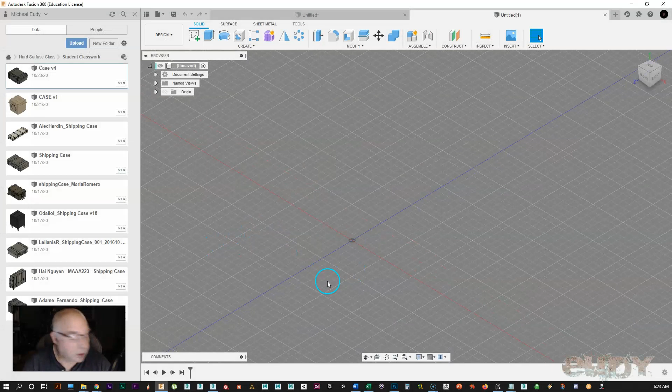Okay, so what I wanted to do is just show you how easy it is to use Fusion 360. And this is a CAD modeling software.

It's also parametric, which means there's no polygons when you're creating. You're creating through solids, not like something like Maya or 3ds Max, which creates in polygons. There's no polygons in this software.

In 3ds Max and Maya, those polygonal modelers, when you're creating something, it's hollow, like skins. In Fusion, when you create something, it's a solid. So when we cut into it, it's just like a solid block of metal or something.

So there's lots of ways to model inside of Fusion, and I was going to show you a quick way how to do some things that would help you.

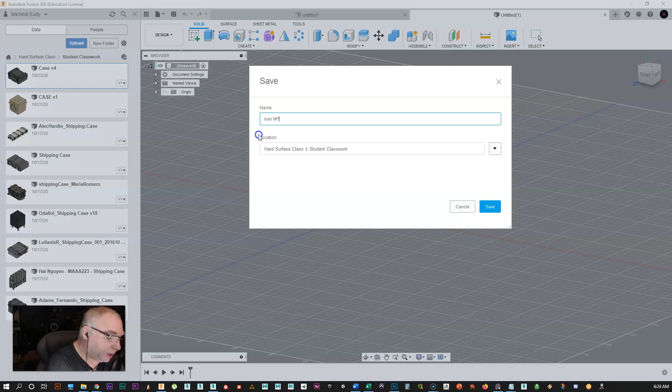Now, one of the first things you want to do is be organized. So I have a new file here. I'm going to save the file and give it a name. By default, it's saving on the cloud, so I've got a folder called Student Classwork. I'm going to base this off of Ivan's sketch, so I'm just going to call this Ivan MP3 Player.

Okay, so it's saved and you'll see it up here. Now, I've initially come in here and here's Ivan's drawing.

I'm using PureRef, which is a software for gathering reference. What's nice about it is it'll float over the top of your software. So here's Ivan's sketch, nice sketch.

I also went in and got some information on the USB port here, because we really don't know how big this sketch is, but we do know how big this USB port is. So that'll help us in creating everything to the right scale.

You'll see here that this says that this is 12.4 millimeters wide. So that's what we'll do, is we'll bring it in here and then we'll calibrate this, so when we're building things, we're building it to the actual scale.

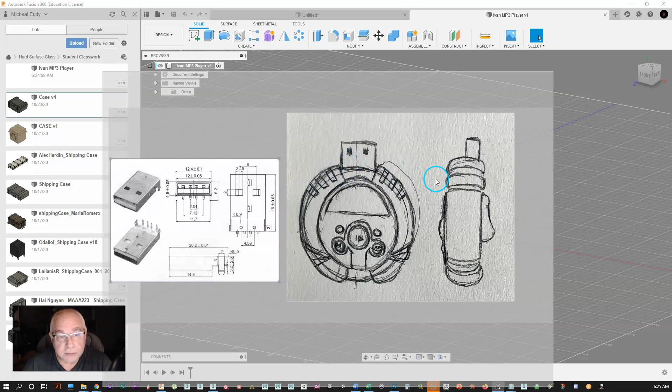Now we want to be organized here, so we want to be creating in layers. There's two ways to do that. You can go right here on the title, right click, and go new component. A component is a layer. You can think of it as a layer, kind of like a layer in Photoshop, but it carries more things like sketches, and our model and everything is inside of a layer.

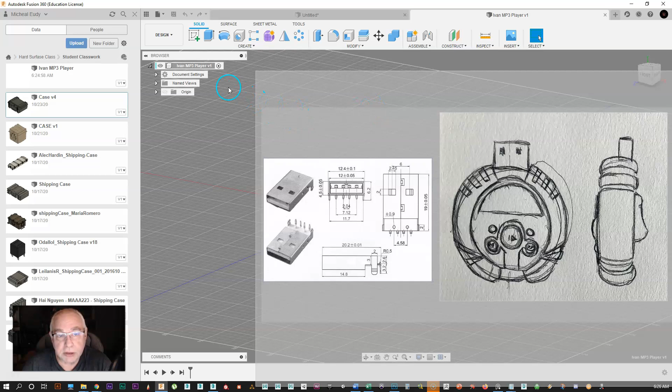Now we want to do that because if we don't organize this, it can get out of hand really quick with our timeline down here at the bottom, and you'll see this as I go along. Also, that's this button right here, so I can click this and say, okay, let's create a new component.

I'm going to say, okay, we're going to call this... we'll say this is outside ring, so I'm just going to call this outside ring that we'll make on this layer.

Now, I don't want to activate this. What this means is that when I make another layer, it's going to put it underneath that layer, make sub layers, and I don't want to do that. So I'm just turning off activate. In other words, when I make this, it will be underneath this layer. This is like my master layer, and there'll be a layer underneath that. I click OK, and you'll see there it is.

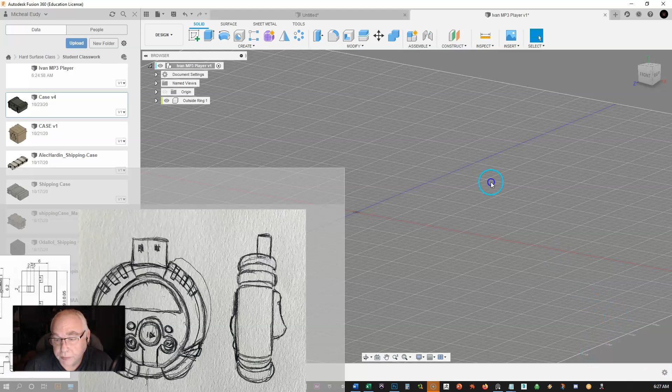Now you'll see I have some little colors on mine. By default, Fusion doesn't have colors. There's a little gear down here in the bottom right hand corner. If you click on that, you can see component color swatch. If I turn that off, you'll see this is the default setting, there's no colors, and this is an advantage to have these color coordinated, and you'll see this here in a little bit. So I'm going to turn that back on, and then it just randomly gives it colors.

So that's the outside ring. We'll make another one, which is the inside—let's just call this base, which will be this base piece here. And then we can make one called controls, so we can put all these controls on that.

And I think that's all we need, because we'll put the USB on the base, and then we'll have these pieces, then we'll have those pieces. So that's about as organized as I need to be. Now, you need to do this up front because you can't do it afterwards. As we make things, you can't move things around, or move the timeline around. So you want to do this up front.

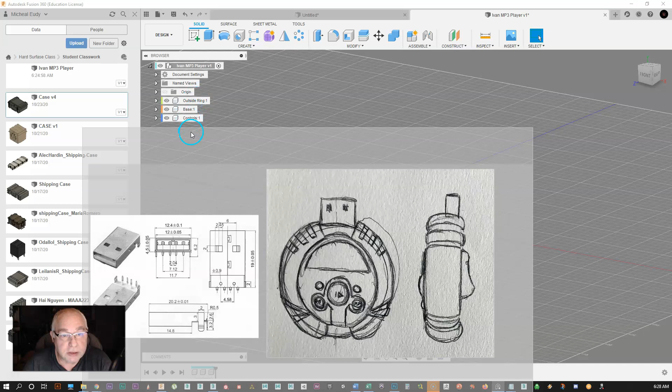Okay, so let's bring our sketch in. Pretty easy to bring the sketch in. You're going to go up here to this that says Insert, and it's called a canvas. That's what we're doing. Then I just have to go find it and have it right here.

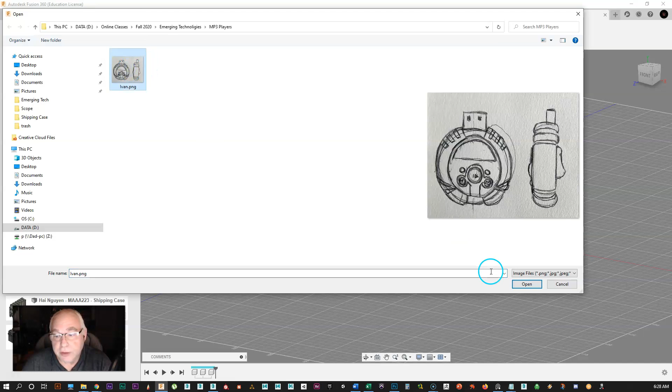And then I have to tell it which way we want it to face. Do we want it to be on the front? Do we want to draw it from the front, from the side? I want to draw it like it's laying down, so I'm going to draw from the ground. So I'm going to go here.

Now Shift, center mouse button is what pans you around, and then this little gizmo is move, but this corner is scale, so I can scale this up. Now we're going to calibrate it here in a minute. I'm just getting it kind of big enough where I can kind of see it. Be sure you grab the corner, because if you grab this, that stretches it. Okay, we don't want to do that.

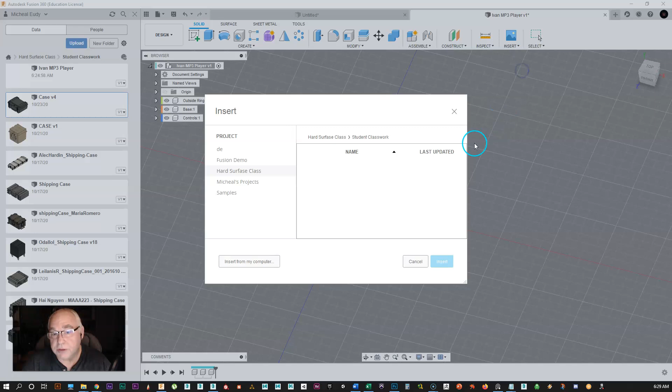Okay, so canvas, from your computer, pick it. We're going to go pick the ground plane and then just scale it up some so it's easy to see it. And just click OK. Go to the top view and I can see that.

All right, I want to rotate that, so you'll see canvases right here. Okay, now I'm on the base layer, and you'll tell by this little black dot here. You'll see this layer, see how it doesn't have a black dot? That's now I'm on this layer. So I'm putting the canvas on the base layer, and you'll see there's some little icons down here. These icons are what I am doing.

Okay, this is my timeline. I can open up Canvas right here. You'll see there it is, and I can tell that I want to edit it, and I'm going to rotate it. I want to rotate it up, and that's 90 degrees. And if I grab this, this is moving it.

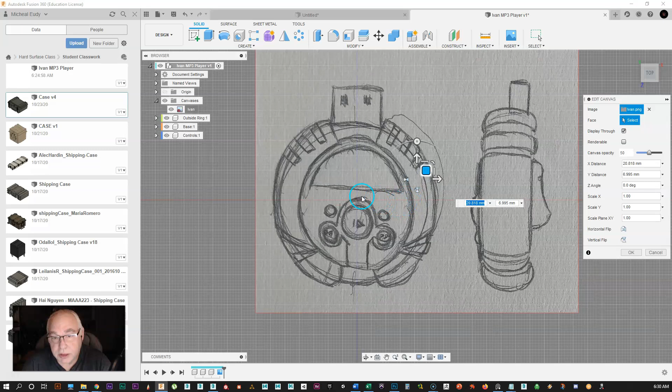Okay, and I'm going to move it so that it's pretty much centered. You could turn down your transparency some if you want to. There's the center of our world. And so it doesn't have to be perfect.

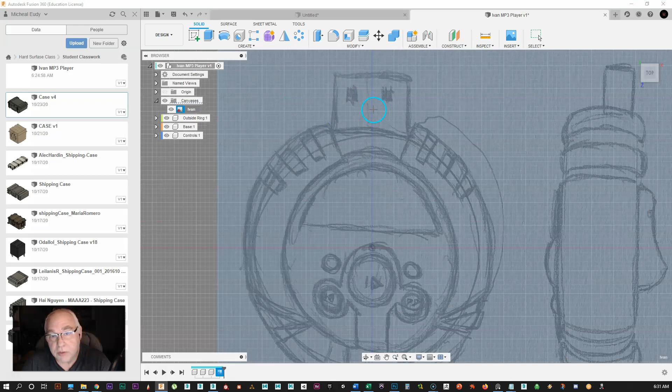That looks good. And now I'm going to do what's called calibrate it. So I'm going to go to here at calibrate. Now I know that this is 12.4 millimeters wide. So I'm just going to click here and I'm going to click there. And then it's going to tell me. So I want this to be 12.4.

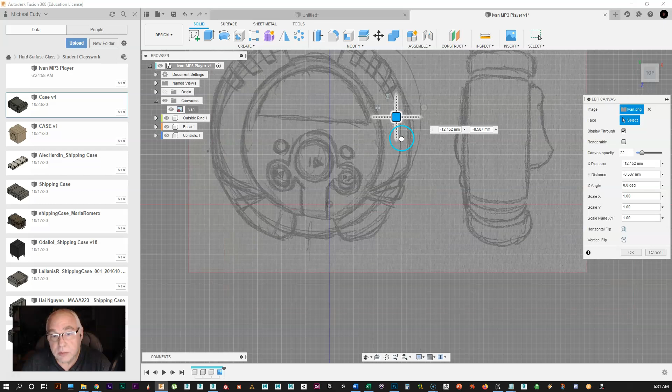And then it will scale it to that. So now I can go back in if I want to do that again, just to check it, calibrate, and I go from here to there, and you'll see it's about 12.4. And I'm going to do that again. Okay. All right, so I probably want to, now that that's calibrated, I'm going to move it again. So I'm going to move it so that's, there's your center point right there, and it doesn't have to be perfect because the drawing's not perfect. And we click OK. All right, so now I know this is calibrated correctly.

Now, if you go up here under Document Settings right up here, here's your units. You can click on this and you can change your units to inches if you want to. I have a tendency to measure in inches, but to calibrate this, the measurement we brought in was in millimeters, and so I left it at the default in millimeters, which is fine.

Okay, so this is a Boolean modeler. We Boolean in here. It's also a spline modeler. We create things from splines. So I'm going to initially create this from a spline.

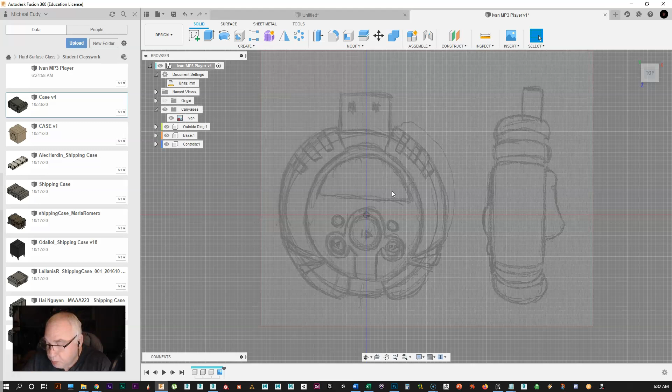So I'll go up here, create. Now, when you're in a three-dimensional kind of view like this, this is my sketch. When I sketch this, I tell it what view I want to sketch on. And now it's ready for me to do two-dimensional drawings on this. So all your tools are right in here, different drawing kinds of tools.

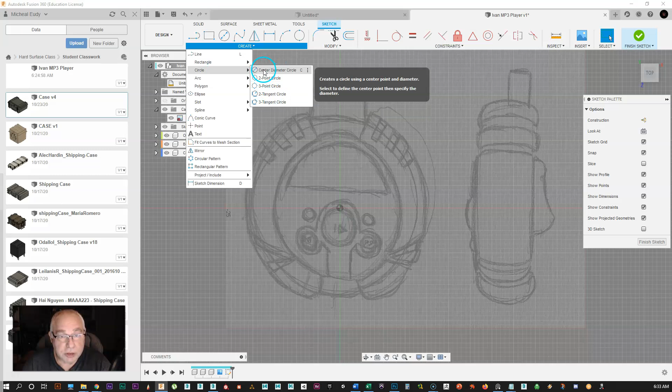Now a line is a straight line versus a spline, which is a curved line. So if you're wanting to make organic kind of curved things, you use a spline. But if we're just doing straight things, it's a line. Of course, then we have rectangles, circles, arcs, all different kinds of things. And like when you're creating a circle, you have different ways that you can create circles.

You can create them from their center or make 2 points, lots of different ways. Now, I have tools up here. For example, some things I'm going to be doing today is creating some patterns, so we're going to be doing that. We can actually put these tools - if you click right here, you can pin them to the toolbar, and it'll pin them up here. So we can actually customize our menu. But for right now, I'm just going to go circle.

Now this puts constraints on things. So when I go to the center and I click, I'm making this circle, and it's constraining it to the center there. Now it's snapping to the grid. I can turn that off if I want to. I can go right over here and turn off snap if I want to, which makes it a little bit easier to flow this.

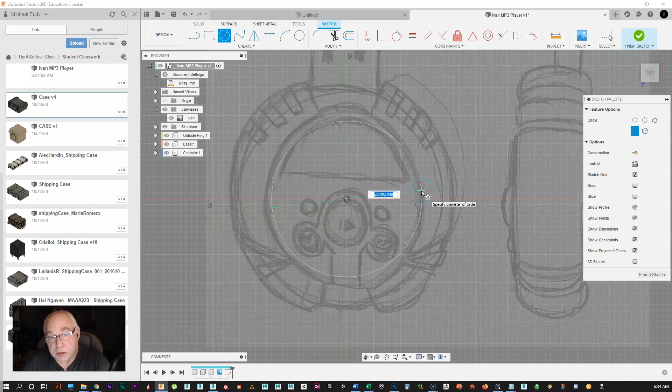And we'll say, okay, maybe right there is our initial circle that we're doing in here. And so then I'm going to finish the sketch. Now what I need to determine is what it is that I'm going to be creating first. So this is the basis of how you do things. It's pretty easy. And then if I want to make that three-dimensional, I just press pull, and I can bring it up, and now it's a three-dimensional body. That's kind of the basis of how we do things in here.

So I'm just going to undo this and go back. All right, so I'm going to be making this outside ring first. That's what I'm going to be doing first. So what I'm going to do is - I think maybe I'll draw my drawings on the base and then make the models on these, maybe. No, we'll just go ahead and do this. So I'm going to go to outside ring, and I'm going to click.

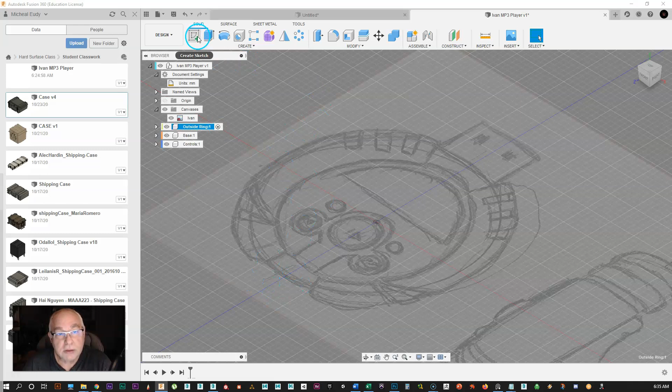Notice down here that you have icons down here. This is my timeline. When I go here and click this, you'll see I have nothing. That's because this is the active layer now. All right, so we're going to make this the outside ring. So we're going to click here, create a circle, snap it to the center. That's the inside of the ring.

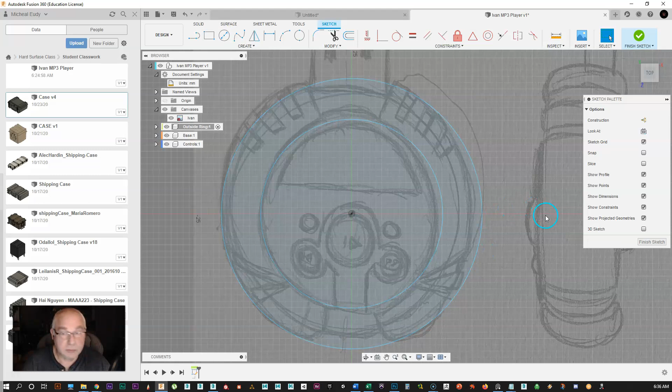Now I have 2 ways I can do this next one. I can go here and make another one like so - that's one way to do it. And I can undo that, Control Z. Or I have an offset tool here. I can click this and then click this line, and then it lets me offset that to create the outside line. So there's several ways that things can be made.

Okay, so there we go. All right, now I want to go ahead and draw in this USB connector in here, so I'm just going to draw that as a rectangle. I'm going to turn my snaps back on so it's easier for me to make it symmetrical. So that'll be to there. We're going to reset this anyway. So something like that. Now that's not going to be the right measurement, so I'm going to fix that.

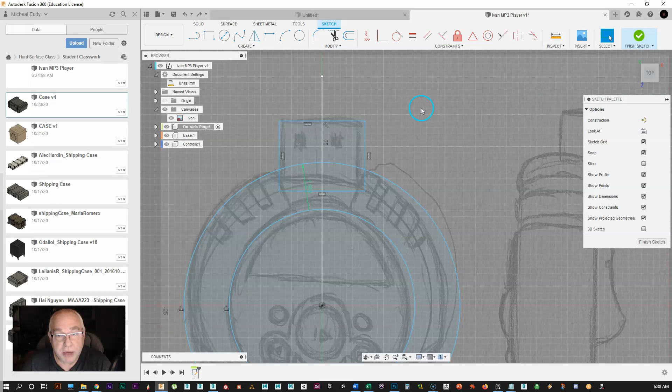I'm going to first do it by drawing a center line here. Okay, now once I have this line, I really don't need this line to model with. I want it to be a construction line, just like a line to measure from. So what you do is make this a construction line - if you click it, go here, make that a construction line, it'll be a dotted line. So these are lines to model from, and this is a line to measure from, is all I'm saying here. All right, so now what I want to do is calibrate this so that I know this distance here, because we know that it's 12.4 all the way across, so this would be 6.2 from here to there.

So I can go here and click Sketch Dimension, pick this edge and that edge, then pull up, and if I type in 6.2, it will scale that. Then I do the same thing again, go from here to there, and that one's 6.2. So now I know that's 12.4 across, and it's centered.

You'll see these little icons that pop up - these are all different kinds of icons. When you're drawing, you put constraints on it. This is software for creating prototypes, so it's very accurate. It's not like Maya or Max - those aren't accurate. I mean, you can do measurements, but they're not very accurate. This is for creating very accurate models.

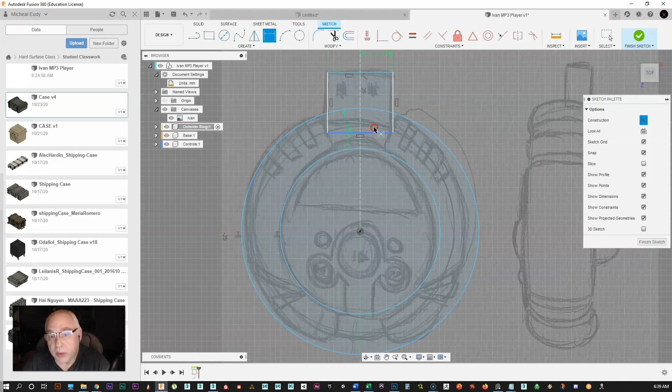So we have sketch dimensions. Now this puts constraints on it, which means I can't change this now. I mean, I can by coming up here and changing it, but I can't just grab something and move it because it's constrained.

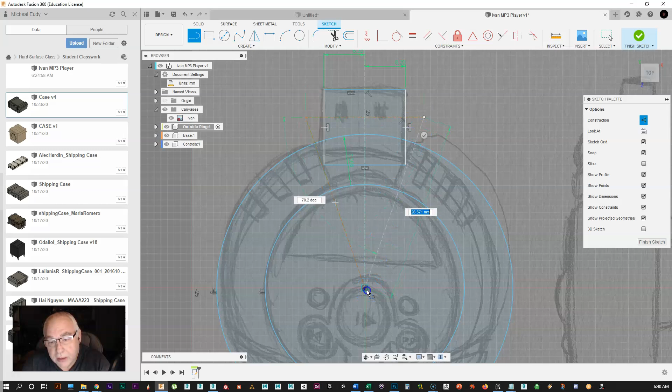Another thing I want to do here now is cut this right here so it only has the arc from there to there. I'll do that by drawing a line, snap it to the center, and go out here trying to go right across that line. I want to leave a little bit of a gap in here, so maybe right about there would work good. That's 3 outside of there, so 3 outside of here. And then go back, and that'll get me - yeah, let's click OK.

And I don't want those - sorry, I was in construction, turn those off, not construction lines. Okay, there we go. So this is where I'll be cutting this piece, so it'll only be arcing from there to there.

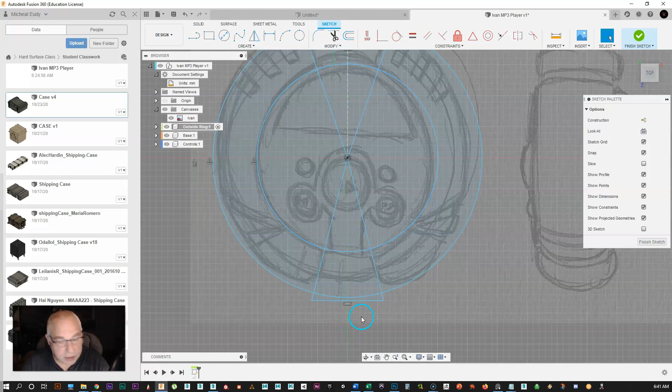I want to do the same down here. Looks like he's got it drawn somewhere right about there, so there and back. Now I don't really need these outside pieces here, so you can use this tool right here, which is trim - by the way, the speed key is T for trim - and I can get rid of that line and get rid of these lines. I don't need those, I just needed this cut piece here.

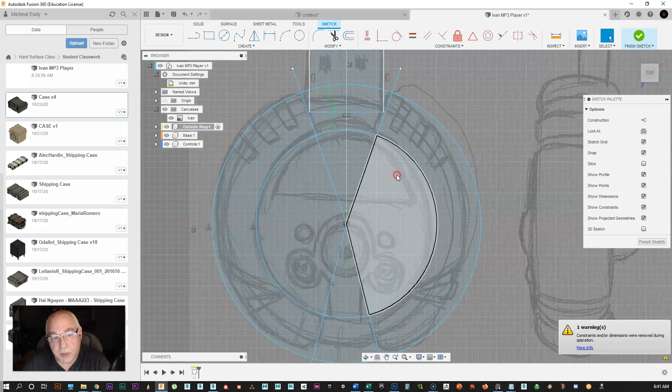Okay, so let's go ahead and make this little arc here, and we'll put that on the base. So we have to create a new sketch, and here, and then we're going to create the same thing as a circle here. Let's turn off our snaps over here. That's fine, and then we're going to create a line.

I'll turn my snap back on now, maybe right about here. And that'll be this piece there. So we can finish that.

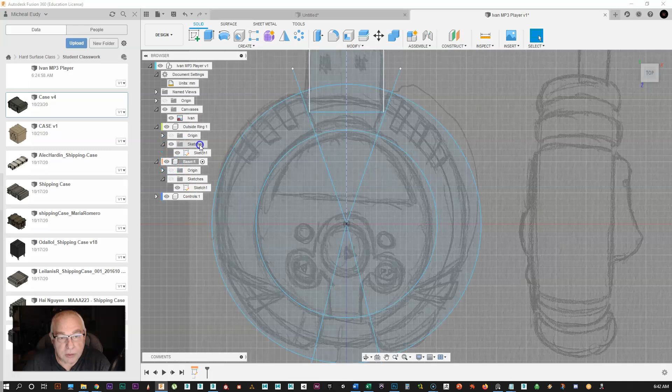Now, to show you, if I open this up now, you'll see that I have - and I'm going to open this one up here too. I'm going to turn that sketch off, which turns that one on, and then I turn this and turn that one on. All right, so I want to go back to modeling on this layer.

And now we're going to turn this into dimensional objects. So I want to take this, and I'm going to do a press pull, and then I can just pull it up for whatever dimension. Now, since we don't know what the dimensions are on this, I'm just eyeballing it. I can always go back and change it later if I want to, but he's got it pretty fat - maybe something like that.

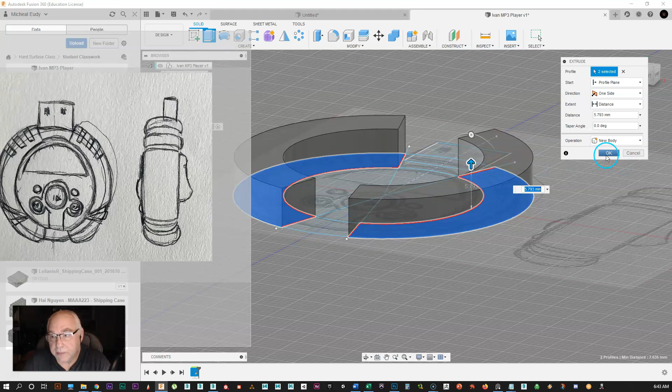Now this, and of course I have all kinds of things I can do - I can type in a specific millimeters. Matter of fact, let's just round this, and I can either type it in here or here. Let's just make this 6.

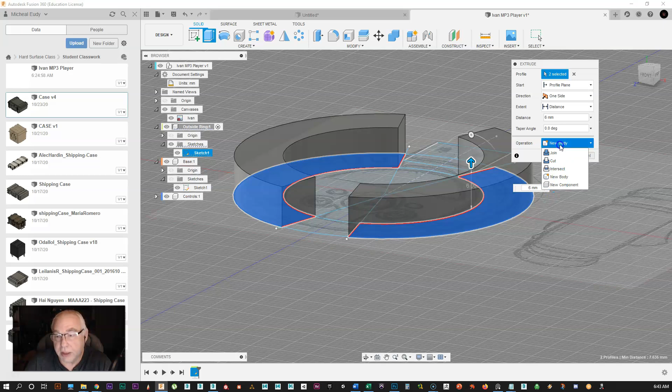And then I can tell it to make a new body. Your choices here are a new body, which looks like a new model, or a new component, which makes it a new model on a new layer, but we want to put it on this layer, so we don't want to do that. This is a Boolean modeler, so when I'm making things, I can tell them to join together, intersect, or cut - we'll show some of this later. But we're going to leave it on new body, click OK, and you'll see I have a new body here.

And it gives me two of these. Now I can rename these - so we're going to say this is left outer edge.

And I'm going to name this right outer edge. You should name things as you go along. Okay, we'll call this one our base sketch, because it can get pretty complicated, so you want to name things as you go along. All right, for right now I'm going to turn my canvas off as I work on this.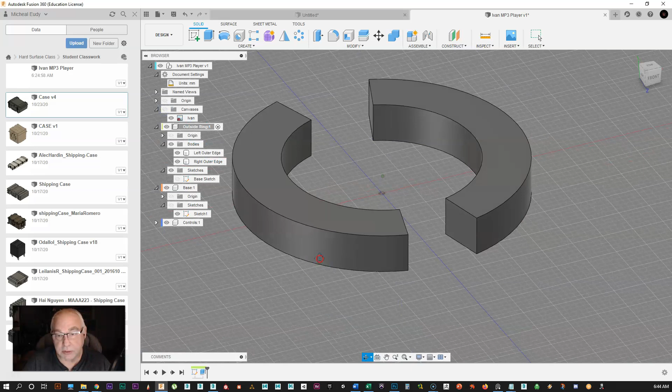By the way, it's Shift, center mouse button to pan around. All of your viewport tools are down here at the bottom. I can turn my grid on and off. I can turn my snap on and off. I'm going to turn my grid off right now.

All right, so now this is really chunky and this is round. Now I could make this completely round, but I'm going to make it roundish with a flat top. But that's just up to me in the way that I want to do it. Everybody, it's a prototype, so you're the designer, so you sketch it out and then you build it.

So what I'm going to do is come in here and grab this edge, holding down the control key to grab this edge, and then right click and say fillet. And then I'm going to click and drag this, and I can round that.

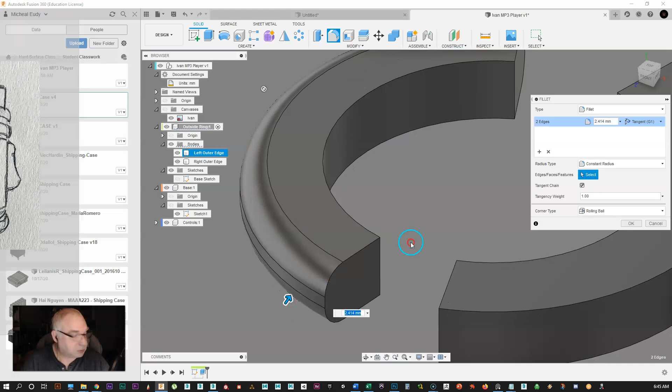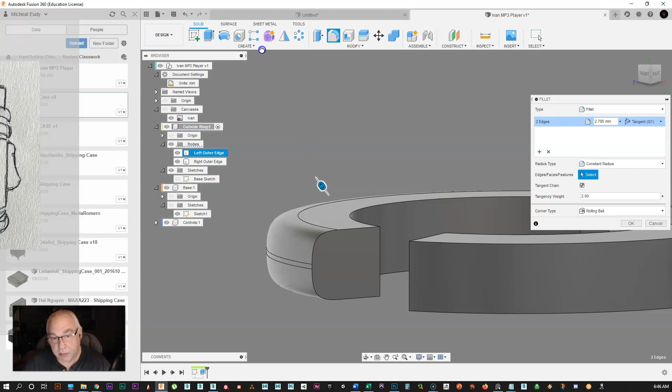I don't want it to be, I want it to have a little bit of a flat edge right in there. I don't want these on top of each other, so I want something like this. Now this has given me complete tangency, but I can grab this and come in here and bloat this out, or change how it's flowing if I want to, but I'm going to leave it at a normal tangency. And there we go.

So that's pretty easy. Since we're not dealing with polygons, I don't have to worry about where am I putting polygons or whatever. This is a great quick modeling tool, and it's accurate, and things can be manufactured from here.

Now, at any time, if I want to, I can go back and edit this. You'll see there's a timeline down here. I can go back in the timeline, turn that off, and go back into the timeline. I'm going to go all the way forward. So I can come down here, right click, and say, okay, let's edit this feature. Or I can pick it here and say edit this feature, and then I can make it bigger or smaller.

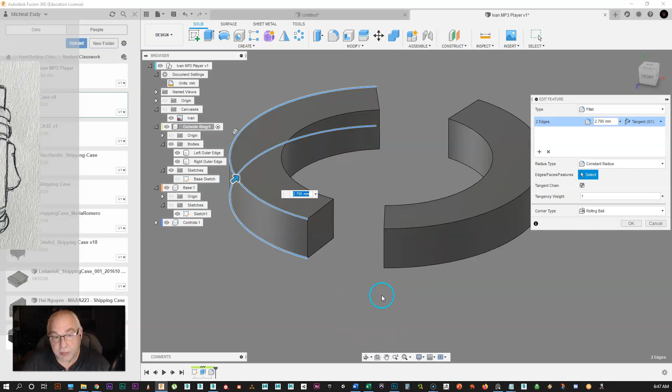What I want, though, is the same thing over here. So all I have to do is hold down the control key. It'll temporarily turn it off, and then I can add edges to it like this, and let go, and I've added it to that edge too. So instead of having a separate fillet over here and a separate fillet over here, it's one fillet doing the whole thing.

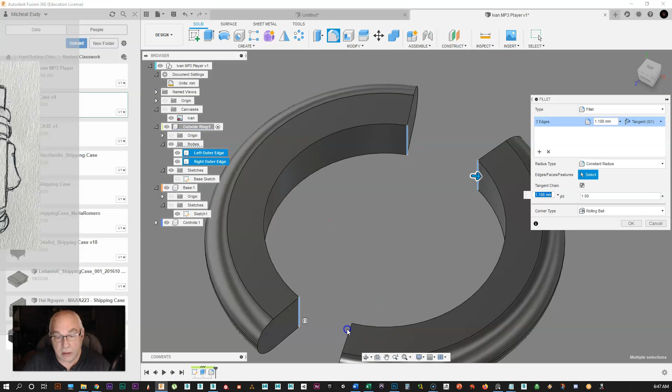Okay, so that's looking pretty good. Now I'm going to want these ends to be rounded. So I think I want to round this edge. Let's see, maybe something about like that. So I'm going to hold down my control key, and I'm going to add those to it.

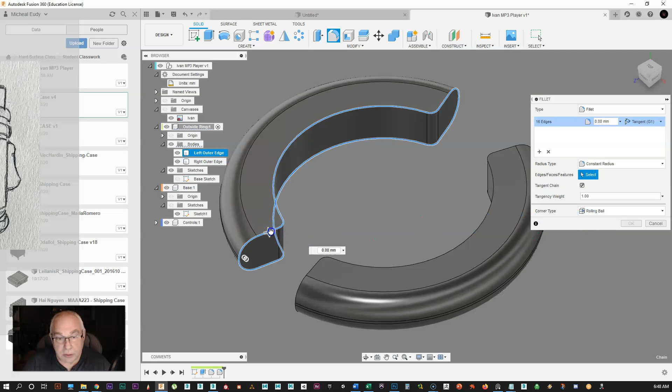And so there we go. And then I want to fillet this edge here. So I'm going to go something like that. And then I'm holding down my control key, pick it over here. And now I have those kind of rounded.

And so that looks like a nice shape. So go to the top, back a little bit. And that's getting me my kind of shape that I have in here. Now it looks like he's got some cuts in there. We can do that. And we've got these little pieces in here.

So let's go back and do those. Let's do these first. All right, so to do that, we're going to use an array tool to array those. So the first thing I have to do is draw one. So what I'm going to do is let's turn my grid back on.

And we can hide this one. So if we go to the right, we can kind of see this piece.

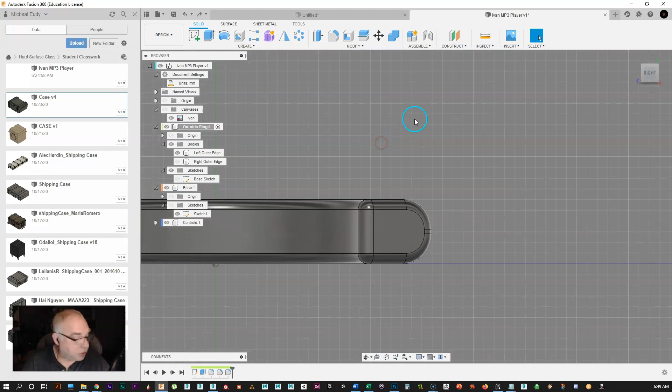So what I'm going to do is a new drawing. I'm going to sketch, and we're going to pick this direction. As a matter of fact, let's don't do it that way. Let's cancel that, right clicking, and let's undo that. What we want to do is draw it on this edge.

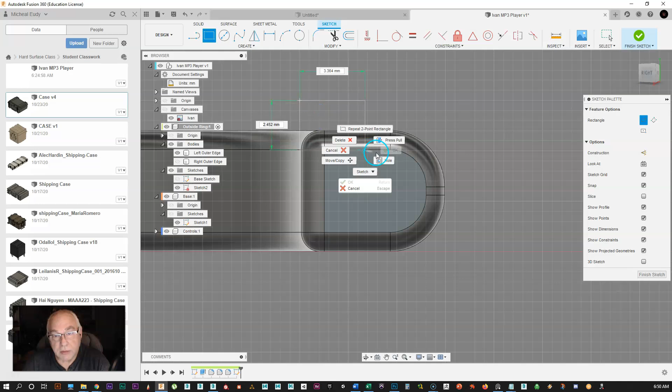So what I can do is say sketch, and then I can pick that, and then I'm sketching on parallel to that plane. We can initially just do a box, and I want it kind of, let's see, we want it to cut a certain distance in. We'll do that later. So I'm going to say maybe right about here. And then what about there?

Okay, then I can fillet this, and I'm going to fillet this at the same time, and I'm going to make that. So I'm kind of trying to follow this curve a little bit here. Don't have to be perfect. That looks pretty good. So I'm going to right click OK, and now I'm going to do an inset.

I tell you what, before I do the inset, let's make it easier if I just trim that off. Okay, now do our inset.

And we want it, how far, it's according to how far we want it to cut into this shape. We'll say something like that. And now I need to close this off. So we'll go here and then there. Okay, that looks pretty good. So I'll finish that sketch.

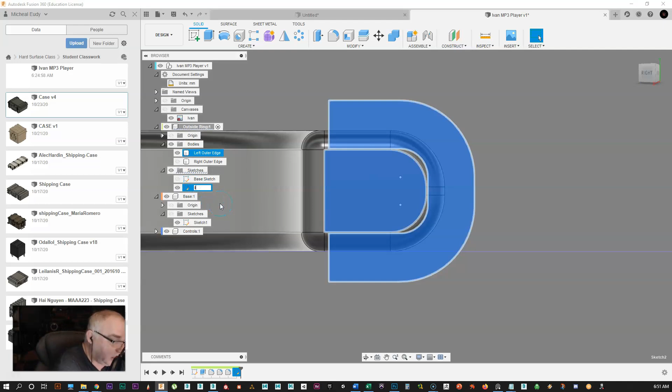Okay, we're going to rename this. We're going to call this our inset cutter, because we're going to use this as a cutting tool. Okay, so we can go here.

So now I can come in here and do a press pull on this. And we'll say maybe something like that.

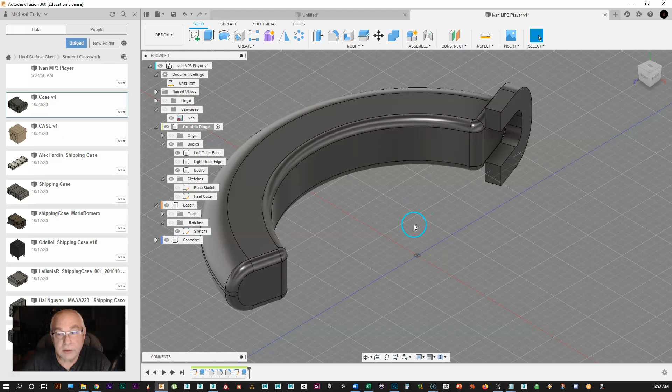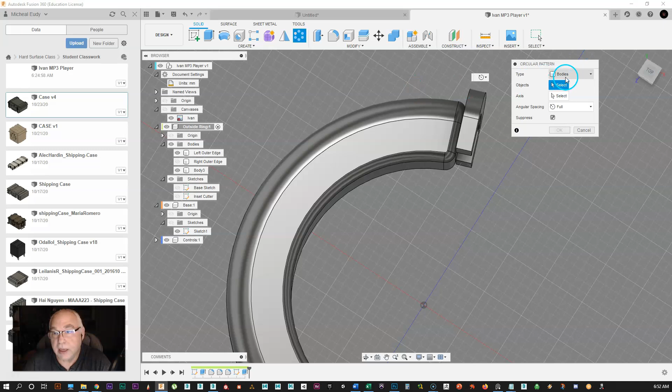Alright, so now I can do an array with this. So what I can do is create, and you can go to pattern, and there's different kinds of arrays. I'm going to use a circular array. I've already got the tool up here, so I just click on that. And it wants you to pick, it could be body or faces, and that's my body. And then it wants me to select the axis that I want to rotate around, and I'm going to pick this axis.

And then I can tell how many I want, and I don't really know. I'm going to say set 30. And that looks pretty good.

And so now what I can do is I've got a thing in here called suppress, which means I can go in here and turn any of these off that I don't want. Okay, so we just go in here and click these, say, well, I don't really want.

Actually, I wonder if I want to maybe take that back. Let's turn on our other body. And I think that's, yeah, it's going to be off there. So we don't want to do that one. We'll do that one separately. So turn these off.

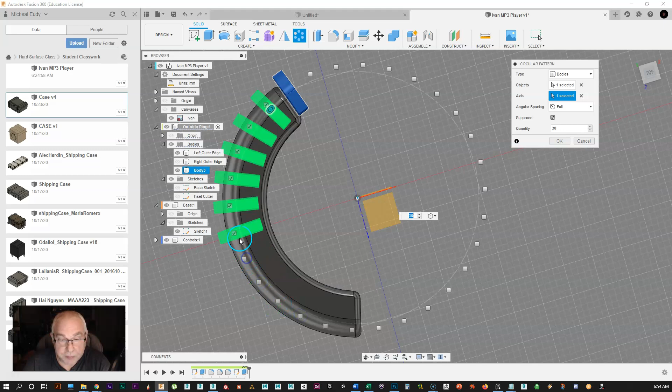So I'm able to do this because this has got the suppress on, which means that when I create an array, I can come in and say, okay, don't create specific ones. So looks like we want those 3 right there. So I can click OK, and then it's going to make those.

Okay, so now what I can do is combine them. This is like a Boolean method. Okay, so I don't need this one right now. I'm going to go ahead and turn that one off. And then I can go Boolean.

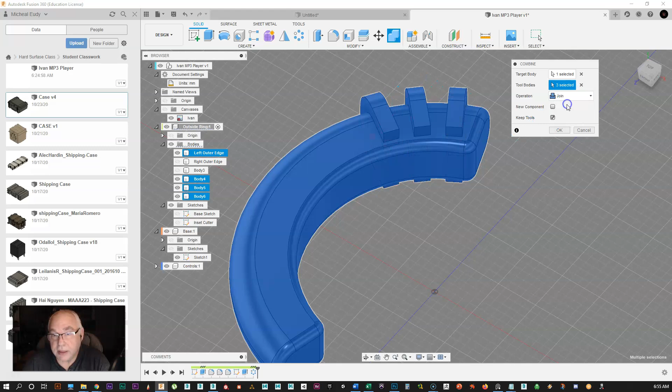Okay, this is a combine, which is a Boolean function. Target body, this is the body I want to keep. And then the cutting bodies, so this, this, and this. Now, I can cut these. I can join these together. Okay, I can do an intersect, but it only leaves me the pieces in between.

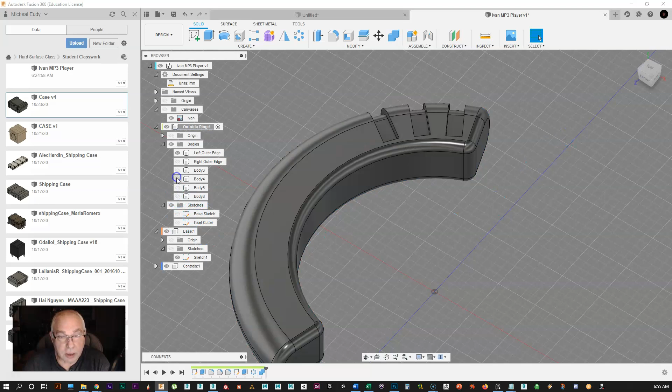But what I want to do is use these as cutting. Now, I have a button here where I can keep the tools. Sometimes I like to keep the tools unless I'm going to maybe modify them. So I'm going to tell it to keep the tools. And then click OK. And then I have to turn these tools off. And you'll see that I was able to cut that groove in there.

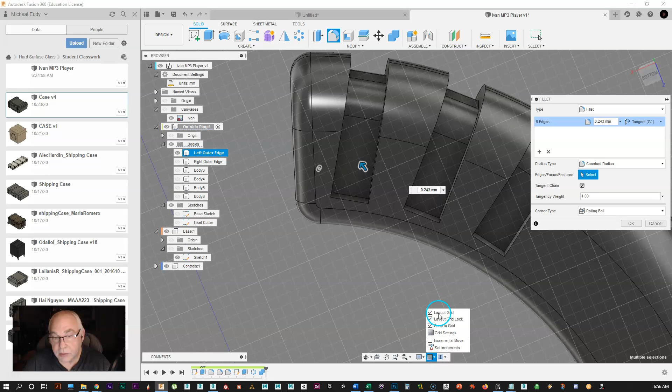Now, there are things you have to determine, and this can be done several ways. I know this is probably filleted down in here, so it's not really square. So I would come in and pick this, and do a fillet there, maybe about like that. I'm going to hold down the control key, and I want this on all of these, and on the bottom too. Okay, click OK on that.

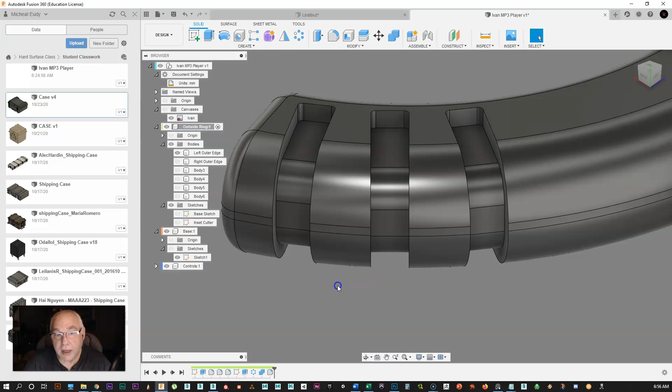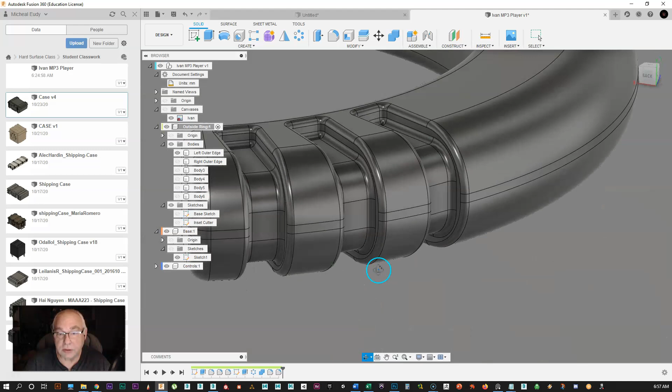And then I probably want to fillet this outside edge. So I'm going to go here and fillet there. Maybe that's still too much, maybe about like that. Control key, I want to put it on this one and that one. And I want to put one down here in the bottom, but I'm not sure if I want it to be the same. Let's just try that. I might want it to be a different fillet, but that looks pretty good, I think I'll go with that. Hold down the control key. Okay, and then I've got all those filleted in, so they're nice and smooth. See how easy that is? Versus, if you tried to do that in 3ds Max or Maya, that's a pain.

Now, another thing you can do is you may have a specific angle that you want to look at it all the time. Let's say this is my angle I want to view it at all the time. Right up here you have a thing called named views. If I open this up, it's top view, front view, right, that's what all these views are, but I can create my own, which is kind of like creating a camera. So if I want to be able to come back to this periodically, right here where it says named view, I can right click, new named view.

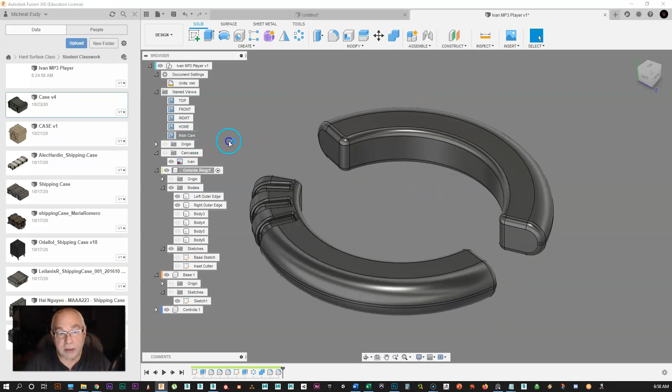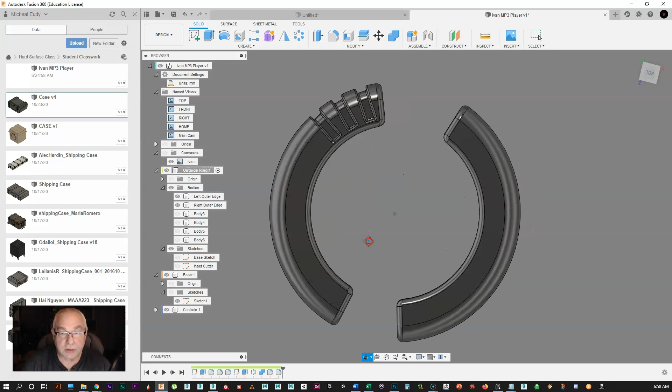Okay, and we'll just say this is our main cam. What this means is, at any given time I'm moving around, I can come back in here and click that, and it's going to go back to that angle. All right, so flying right along, we're getting this in there. Now you just have to decide certain things. I've got this going straight across here. Now, looks like his, and I don't know if he designed it this way. Maybe he's wanting it to be at an angle there, to cut at an angle, and we can do that too. Let me show you how we could do that. Let me think about it here.

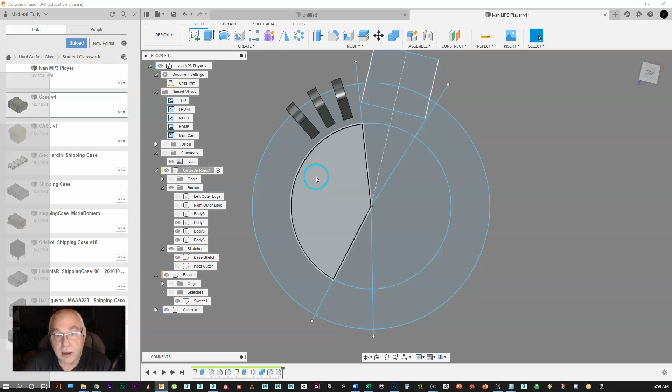That's if we wanted to go back to, let's hide these for a minute, we're going back to these bodies. Okay, so let's turn our sketch back on, and what we're going to do is edit this sketch. I'm going to go back to my base sketch, right click and go edit sketch, and then I'm back at this sketch. Now, actually I don't want to do that, because that turns my geo off. So what I'm going to do is just create a new sketch.

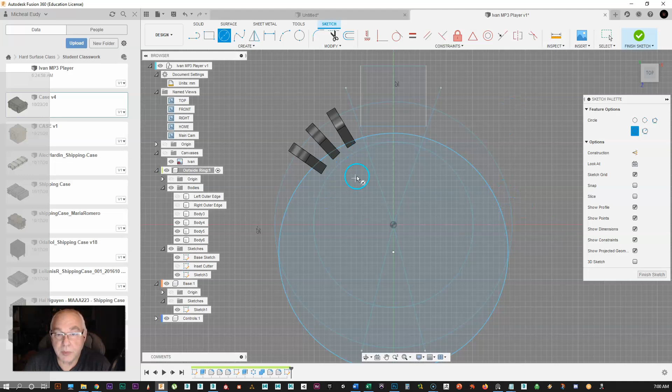So we're going to create a new sketch here, and then what I'm going to do is create a circle, maybe from right about here. Turn my snap off over here, and maybe right there. Okay, I'm going to finish that. And that's this one, and I'm going to name it, so I'm going to call this my Inset Slicer.

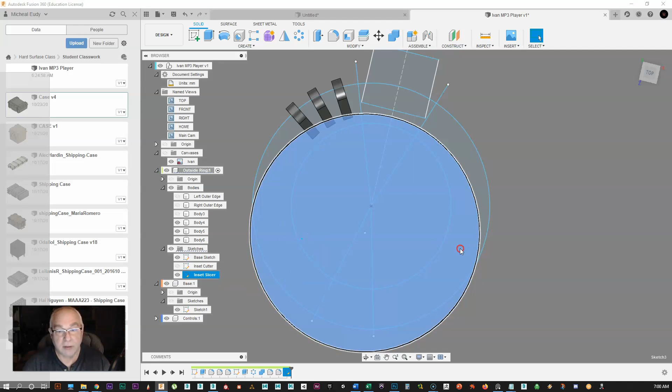Alright, so what we can do here now is come in and use what's called split body. So I can pick these bodies, and then we have a splitting tool, and it's going to project up and cut those. So I click OK, and then that projected right through and cut those pieces.

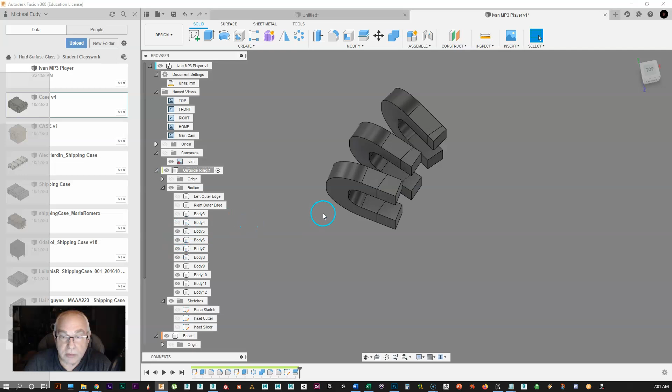So now when I'm picking things, on your keyboard F5 allows you to pick a body, F7 lets you pick faces, and F8 is picking edges. So right now I want to hit F5, and I don't want this piece. Now if I hit delete, it's a problem, okay? And the reason is, we've got to turn off, I told it to leave our original pieces. So what you have to do is pick these, and come over here, and what you want to hit is remove, not delete, because if you do delete, it deletes that whole construction history. So what you're doing is removing them. So we remove those.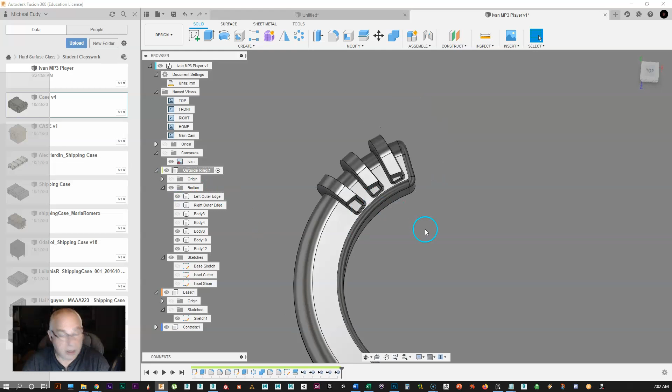Remove that one. Okay, so now we've got those at an angle. So that's how we would do it if we wanted to cut those in at an angle.

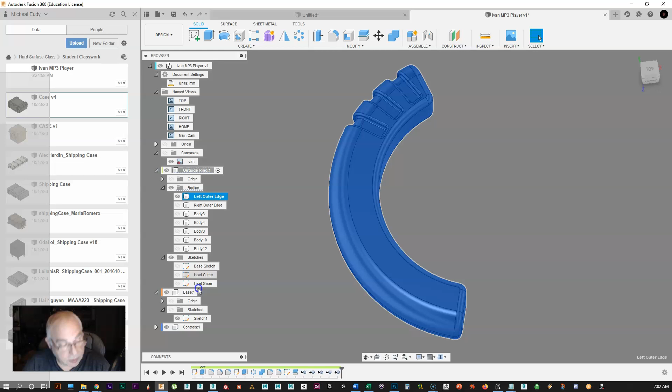Now we can go back here, and here's what's nice about this: at any given point I can go back to our timeline. So if I go to F7, I can pick that edge. That's this right here, so I can delete that bevel out of there.

Okay, here's my array. I can also suppress it. Suppress it turns it off. I can unsuppress it, and then I'm going to delete that.

And that's going to mess with other things on the timeline, so I don't want to delete that. I'm just, matter of fact, can I not? Maybe press that. Yeah, I can't do that.

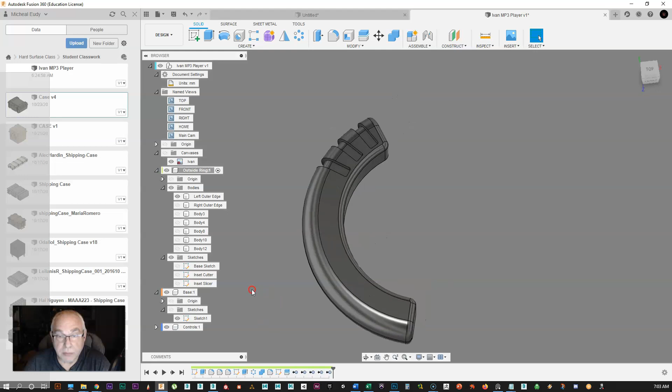Okay, so if I want to have those angles, I'm really going to have to just roll my timeline back to before that array. So really I'll have to delete these that I made. Just go back.

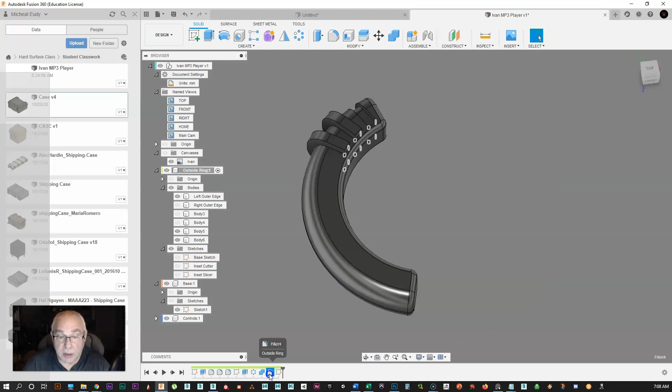Let's see, this is where we should be able to maybe keep that. We need to delete that fillet. We need to delete that combine.

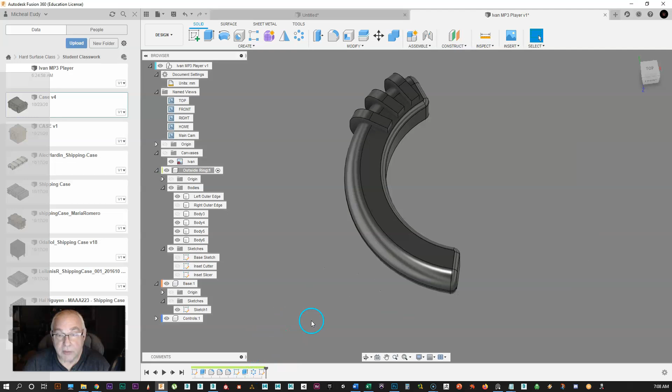Okay, so we have the array, and then we have the sketch. There we go. Okay, so...

Alright, so now we'll split these. So, split body, this one, and this one. And turn our sketch on. And select our splitting tools. And click OK. That'll cut those.

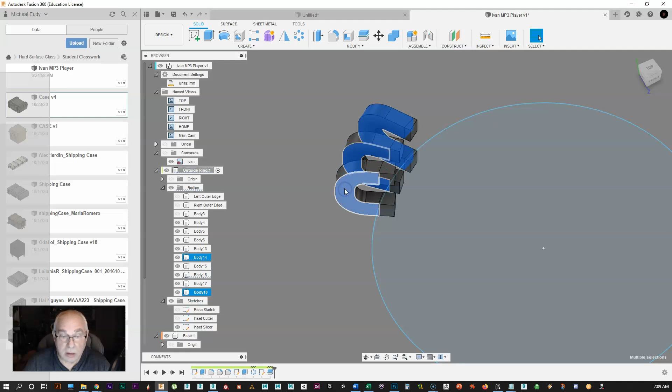I need to pick. Okay, I need to go to F5. And I turn that sketch off. Okay, so now I can. Let's pick these. And I have to remove those.

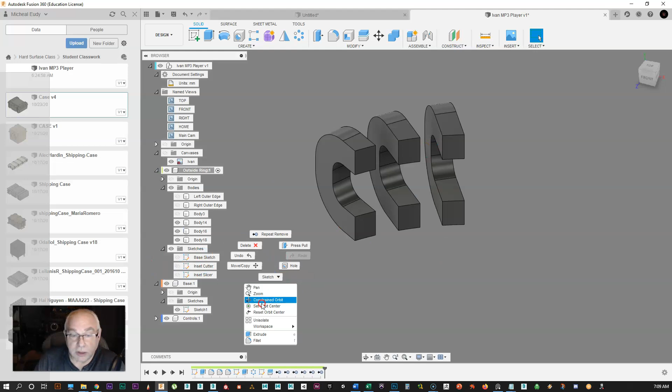Now I want to show you another thing too: we can do fillets and stuff on these before we use them as cutters. So like I could come in here—whereas we did filleting after, you could do filleting before too. So I can come in here and let's pick F8 for edges. Let's go here. We're going to fillet that.

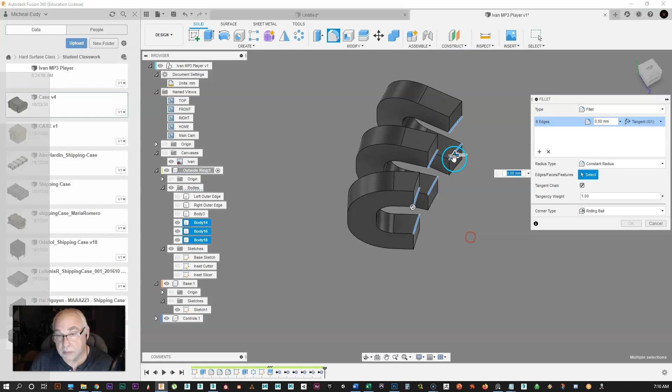So we fillet those. And then I'm going to want to fillet that. Go there, control this one, this one, this one, this one, that one. And so we can curve these cutting tools.

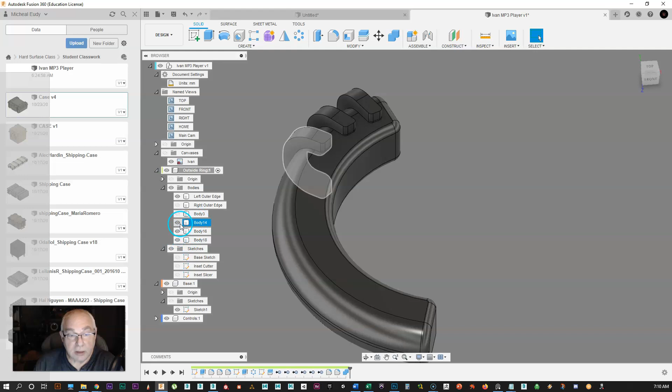Okay, so now combine. This is our target body, this, that, and click OK. And then let's turn those off. And that created me a piece down in like that.

So then the only thing I need to do is to fillet this top edge. And that's too much. Maybe 0.2. Yeah, that's okay. So here and there.

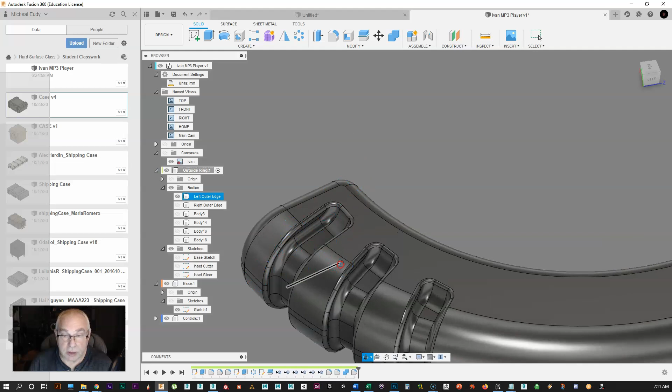So that's two different ways you can do it, and you get different looks, okay? You'll see there's a little bit different look because before it was more square. This gives me this kind of a smooth dip down in, whereas before it was a little more hard-edged in there. It's just according to how you want to do it.

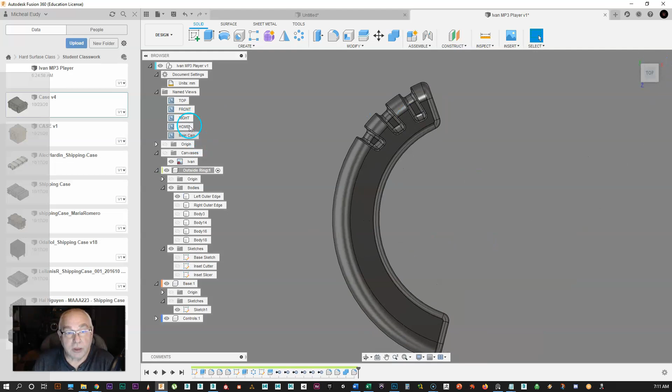And so now we have those that are more at an angle. Okay, so let's go back to our main camera. And so now we have those at an angle.

All right, I think I'm going to stop this video at this point and make this as number 1, and then we'll come back to add number 2. Okay, so stage 1 of creating our MP3 player. Hope this has helped you understand some directions of how to go.

One other thing I would like to mention is you'll see this is kind of faceted looking. What you can do is right click and go to display detail. By default it's doing a kind of low poly, and I can tell it to do a medium poly, and now it'll be a little bit smoother looking. That's just based on your computer and what it can handle. In the end, it's just a viewport thing—it's not really how smooth the model is, because the model itself has no polygons.

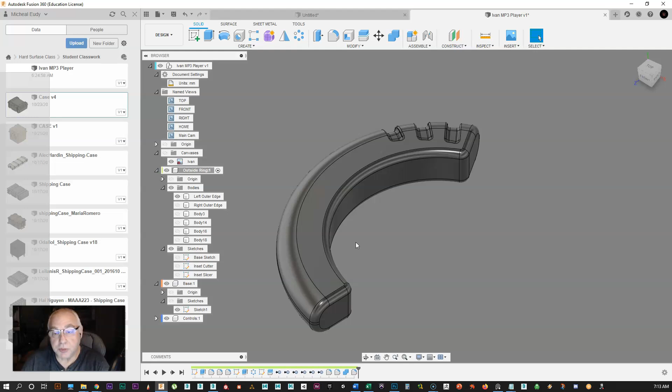And so later we can export the model and convert it to polygons. But this is just smoothing in your viewport. Okay, so you can do that. Hopefully this helped you, and we'll come back in a little bit to part 2.